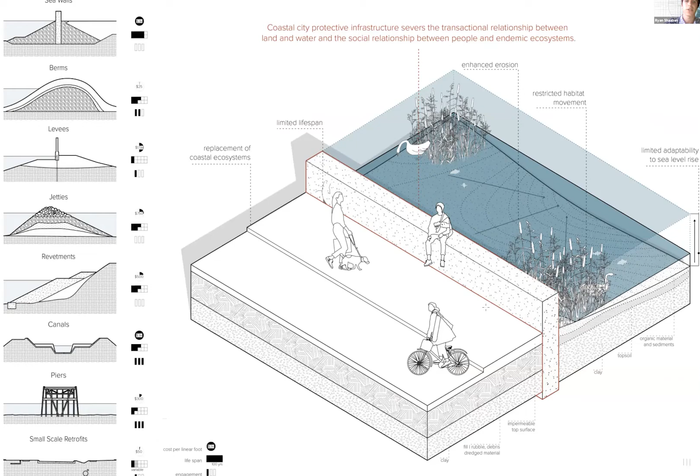So in order to address the issues of hard infrastructure and sea level rise, this thesis in a poetic sense strives to change the perception of how we as humans relate to nature by accommodating the dynamic qualities of water into the urban grid. San Francisco is a great location of study.

It's a peninsular condition in which the majority of predicted inundation occurs on the bay side. In this estuary, there were once over 500 acres of ecologically rich tidal marshlands, but they were filled in the late 1800s. To protect those lands, the Embarcadero seawall was built in 1916, and to this day is their only form of infrastructure and in need of repair.

It protects over $100 billion worth of assets, including vital transportation networks, such as the BART and Muni Rail. The city has set aside $5 billion to repair the system, but here as designers of the future, we must intervene and say, instead of pouring money into a broken system, we need to invest in adaptive strategies that renew the balance between urbanity and nature.

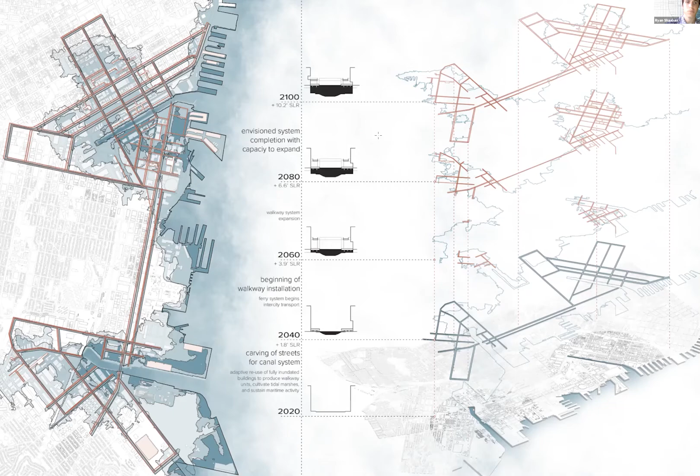On the lower level of this system, floating walkways take place of traditional sidewalk, where pedestrians board boats at the corners. In order to cross, pedestrians go along ramps that rise up to 25 feet to allow for ferries to pass below. The upper level is dedicated to alternative means of transportation.

Since we're in an innovative city, such as San Francisco, we can expect technologies such as compact electric cars or various personal transport vehicles to be commonplace.

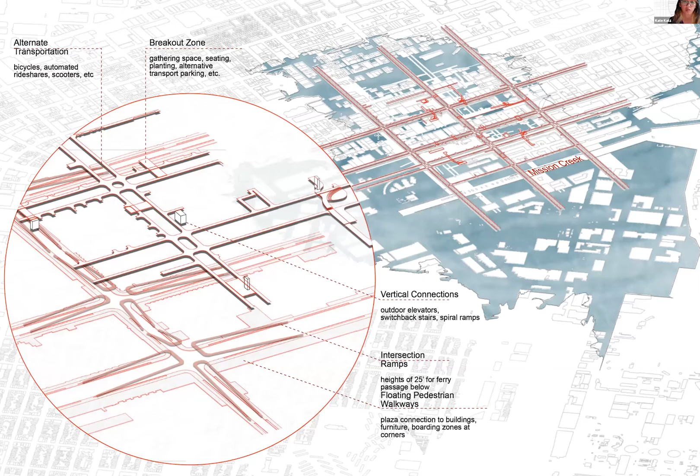Together, these elements create a circulation network, where instance moments, such as the way a path connects to a particular building, become moments of pause and relief to enjoy the new cityscape in the area.

On the lower level, the paths widen to become plazas, while on the upper level, they become breakout destinations, which can connect to certain occupiable rooftops that are given back to the public realm. Since San Francisco is culturally a walking city, this system emphasizes the pedestrian network.

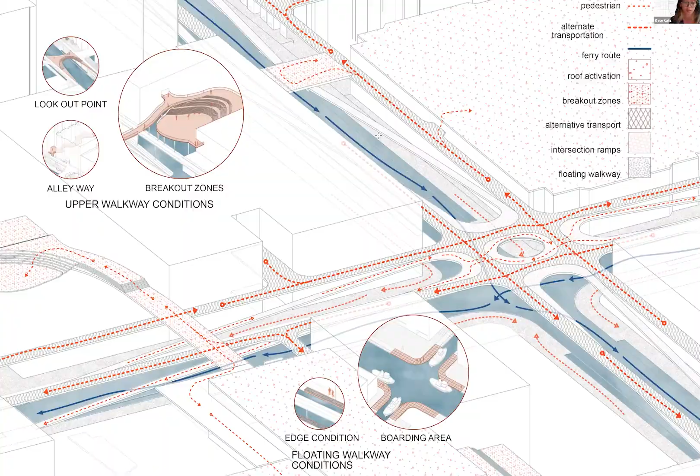All of these moments composed together create a distinct waterfront district that allows San Franciscans to engage with coastal ecosystems while building systemic support of maritime activity.

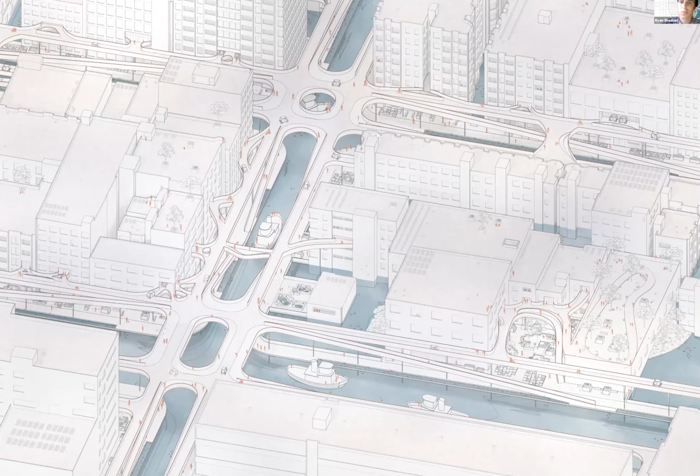This perspective shows the makeup of the floating walkways and how, in either addition or subtraction of the modular walkway surface, one can create street furniture elements or apertures to engage with the ecology below.

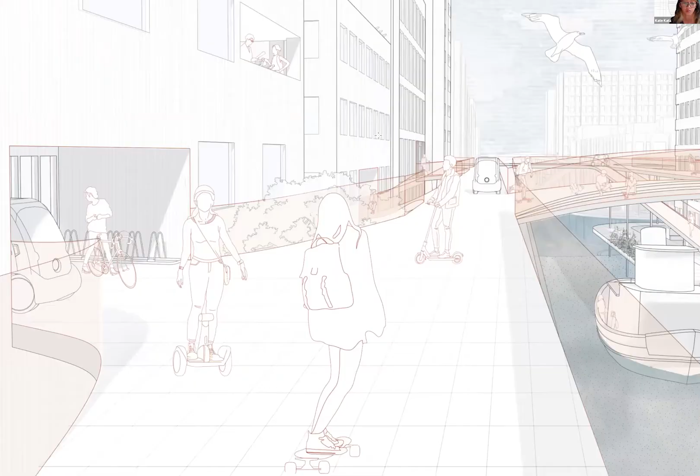This upper walkway perspective shows how the ramps slope to connect to the buildings, where there is a second raised lobby floor, and the building accepts the walkway in the language of a carve.

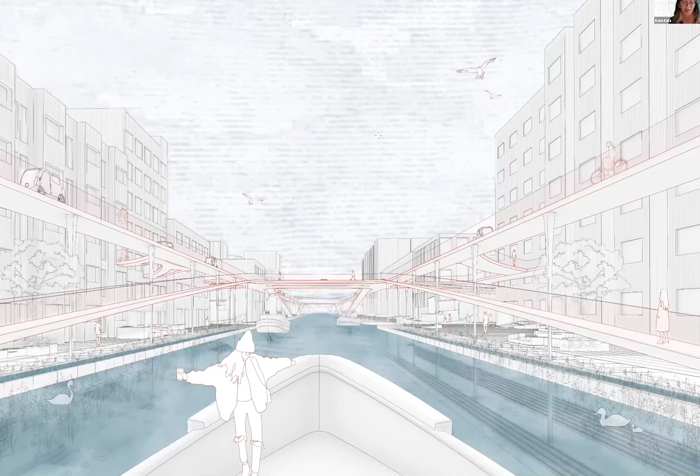Finally, a boat perspective. These boats become the main form of public transportation, taking place of city buses along major streets, while smaller personal boats can be used on secondary streets.

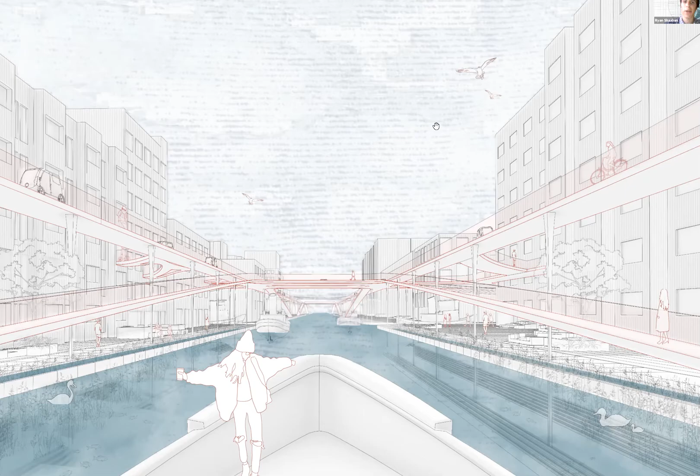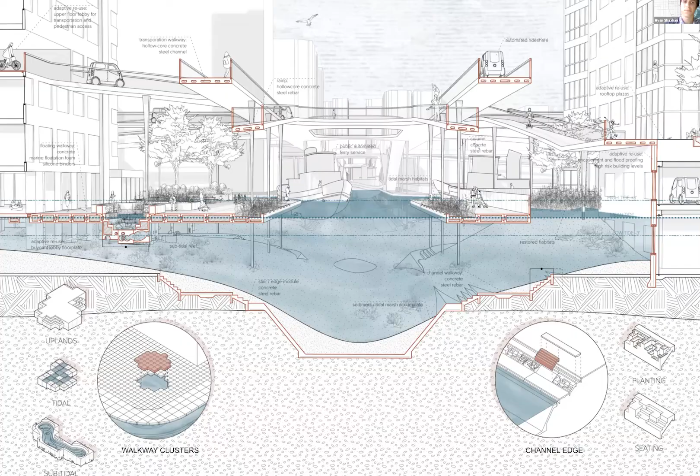The floating walkway is composed of modular units that are buoyant, allowing the pedestrian levels to adapt and fluctuate with diurnal tidal changes. This system enables a once restricted landscape of wetlands to take place within the city, connecting pedestrians to their environmental context. This new vision of the public realm in this waterfront district hopes to shine an optimistic light on how we can live with nature once again as we deal with the consequences of climate change.

Thank you. Thank you.

Shelters for women first appeared in the 1970s in rooms rented by volunteers or apartments rented by individuals. In the next decade, they were institutionalized and experienced professionalization. And even though the number of shelters has grown significantly, the majority still exist in housing infrastructures that have been slightly modified to accommodate a higher number of women and children.

Our thesis focuses on the typology of shelter for women and children survivors of domestic abuse, and we propose a new model of women's shelter that investigates the architecture of boundaries as a spatial organizer and regulator between public and private areas. Additionally, we're considering the stages of healing that women and children go through after escaping an abusive situation and their transition to community.

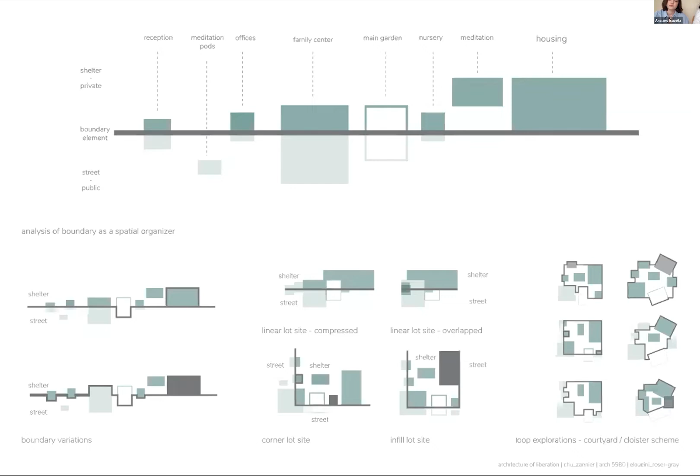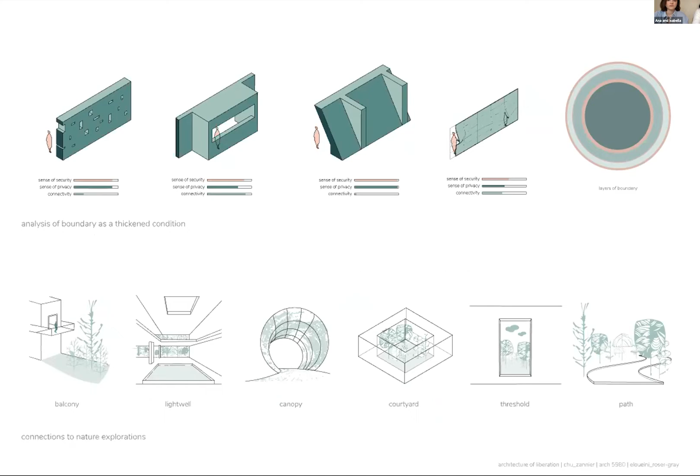The diagrams above are an analysis of the boundary as a thickened condition, based on three criteria: sense of security, sense of privacy, and connectivity. The diagrams below are depictions of spatial moments where there's a direct connection to nature with the built environment.

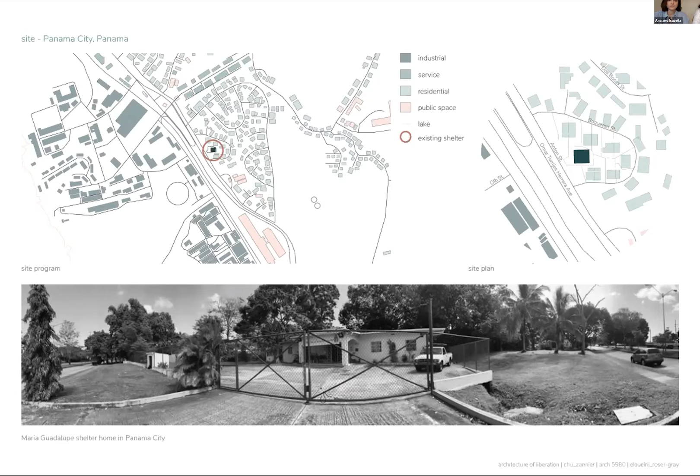Here you can see a comparison between the existing layout of the shelter and the proposal of our project. The difference between these two is that in our proposal, we are moving away from the idea of a single building and introducing a network of different buildings.

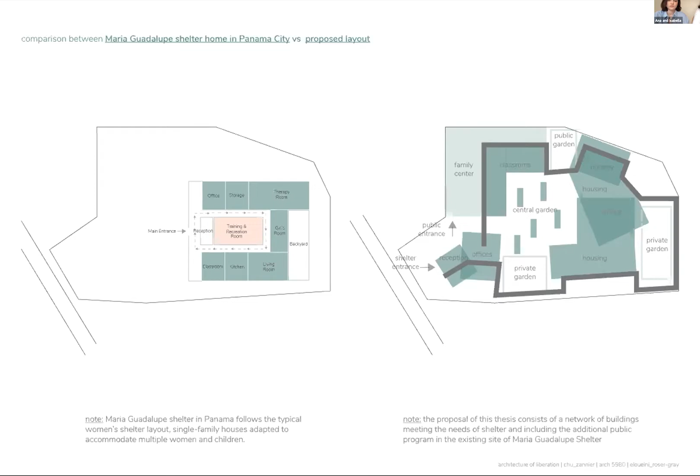Here is a bird's eye view of the entire project. As you can see, the project is divided into 3 main volumes, where number 1 is the family center, number 2 is the entrance to the shelter, and number 3 is the housing component of the shelter.

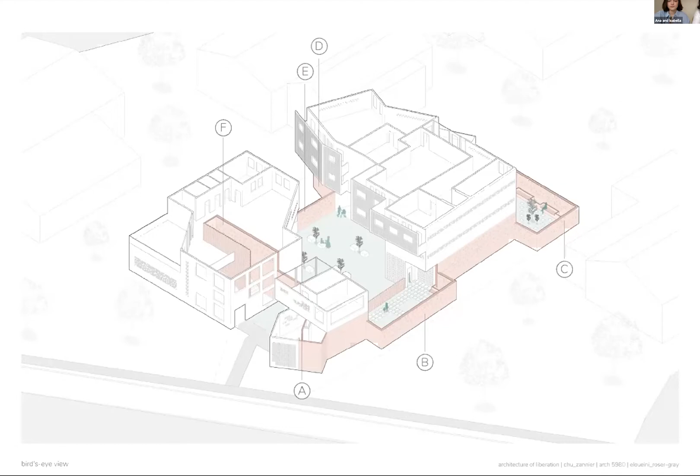Here you can also see, in the continuous element of the boundary, the specific locations where this boundary has variations. These are the 6 different boundary conditions that exist in the project. First, we have a threshold condition of the boundary.

Wall type B is the boundary opening up to create an extra layer of privacy, which would be semi-private. Wall type C is the boundary holding planters for gardening activity. Wall type D shows the boundary completely surrounding a volume to create an extremely private moment, which is the nursery in the shelter.

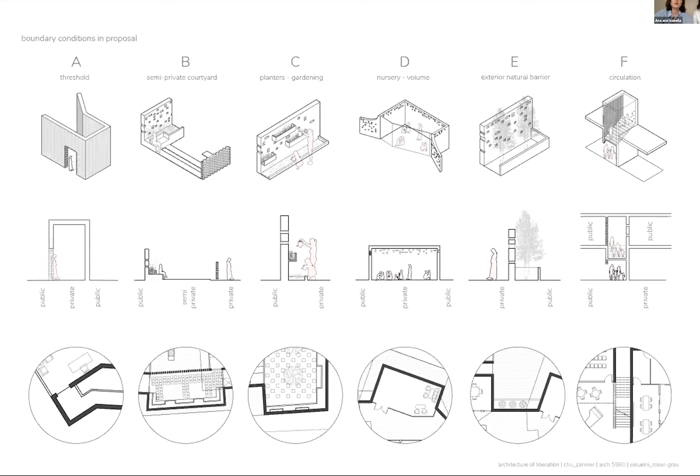Wall type E has the boundary accommodate an extra layer of privacy with vegetation. Wall type F is the boundary holding vertical circulation, or stairs.

On the ground floor, you can see this boundary element continues throughout the entire site. It starts with the threshold condition at the entrance of the shelter. Then this is the semi-private corridor that the boundary creates. In the family volume, it holds a service space and vertical circulation.

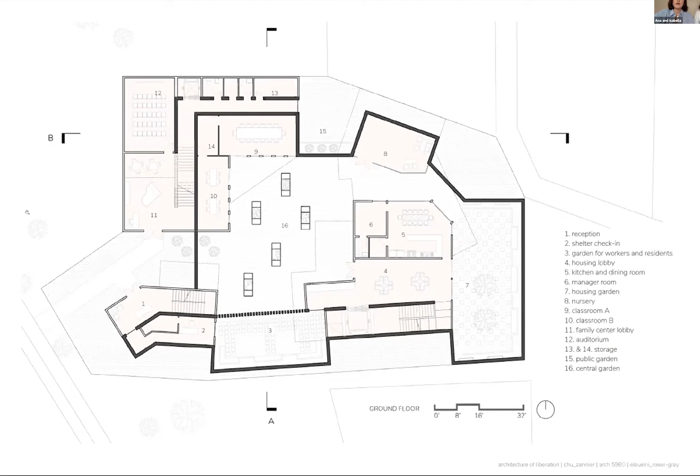And then in the family center, pierce through the volume to completely separate areas of that building to be completely private from the public space of the family center. And then on the upper levels is where the library of the family center takes place, offices for workers, and bedrooms for the women and children of the shelter.

In section A, we're cutting through the family center and we're showing the boundary as a hallway and divider, then the main central open space of the project, and then the semi-private corridor, which is also wall type B. And in the middle ground, you can see the facade of the housing component.

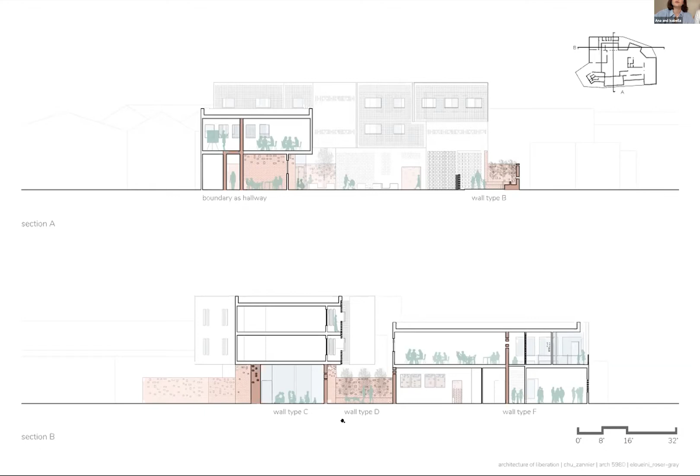And then below, section B, we are cutting through the nursery space, surrounded on both sides by the boundary, and with the bedrooms above that are hovering over the boundary. And then we're cutting through the family center as well, showing the boundary as vertical circulation. In the middle ground, you can see wall type E, which is the boundary, and the vegetation layer.

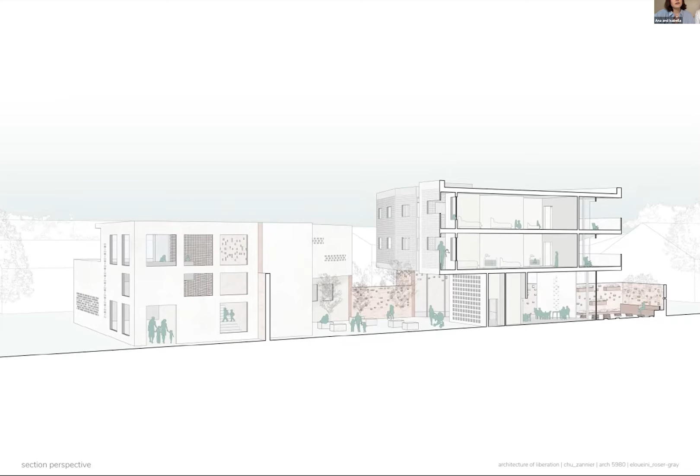And then in this section perspective, we're cutting through the private garden in the back of the housing component of the shelter, the common space on the ground floor of the housing, and shared balconies at the back, and then in the front of the building, a double facade system that allows for more private set of balconies.

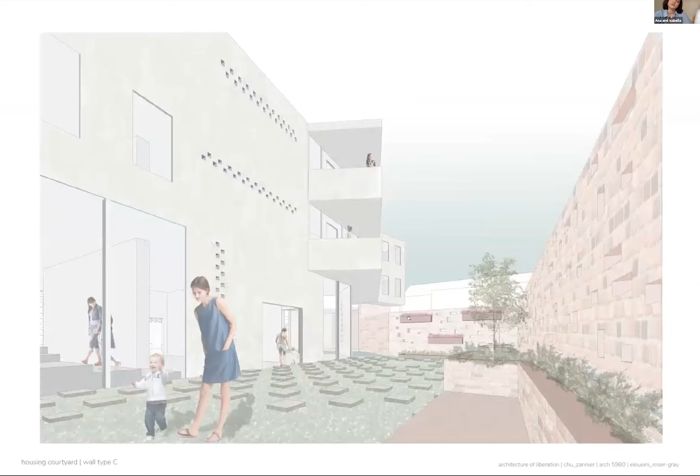Then in this vignette, you can see how the boundary creates this semi-private corridor leading towards the entrance of the shelter. And then here, you can see the private courtyard in the back part of the housing component. And then here, you can see how the boundary creates that space of the nursery and the relationship this nursery has with the central garden of the project.

And here, you can see how this boundary goes inside the building and inside the family center and creates the main stair of the building.

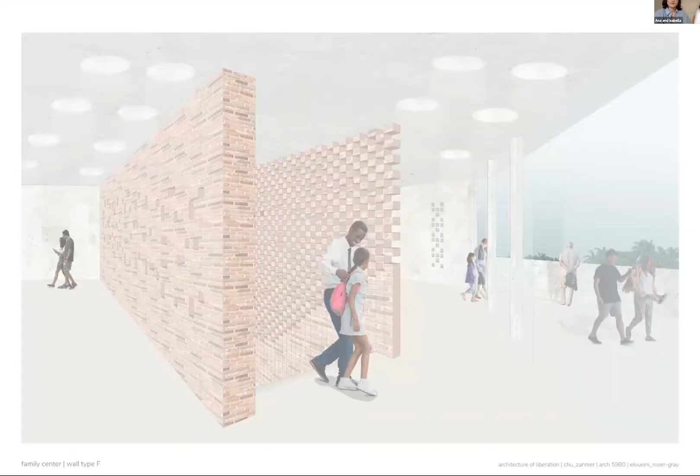Yara, are you ready? Okay, thank you everyone for joining us today.

The title of my thesis project is Involuntary Utopia: Excavating Peace in Subterranean Jerusalem. In the Israeli-Palestinian conflict, the act of architecture is an act of violence, and it's an act of occupation, and it's the architecture of frontiers.

I posit that in the near future, urbicide, which is defined as violence against the city, and spatiocide, rather than genocide, which is the targeting of land, as defined by architects Eyal Weizman and Sari Hanafi, will destroy the urban fabric of Jerusalem.

The following proposal is a speculative exploration, proposing the subterranean realm as the new frontier, where the act of architecture will unite these parties rather than divide them.

Already, the underground is becoming the site of many activities, such as the smuggling of goods and people across borders, and warfare and espionage. Tunnels appear at the seam of the highest conflict zones, such as Gaza and the Golan Heights.

In Jerusalem, underground spaces have a different connotation. These are sites of preserved history and narrative making. As the city above falls victim to this urbicide and spatiocide, and her people become accustomed to life underground, they are driven below the city's surface.

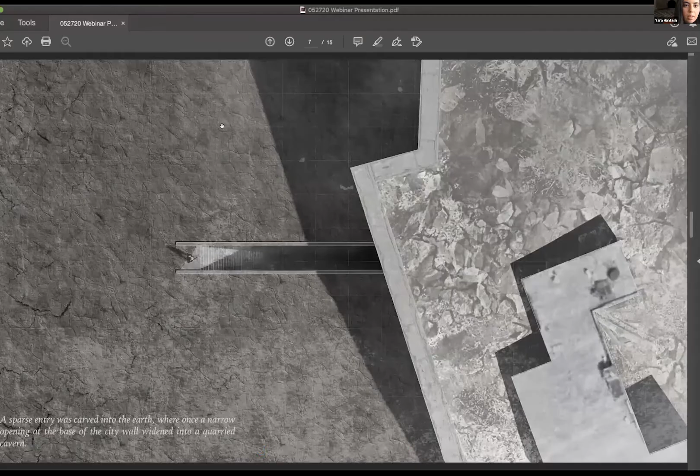Yara, your screen is not moving, so you want to make sure. Sorry for interrupting. Oh no, sorry that it's not working. All right, so can you take a few slides back and start again? Yeah, here? Okay. It wasn't moving from the first slide, so you might want to go back a couple. Okay, so is it moving now?

Okay, and so here could you also make it full screen, please? Yeah, it shows full screen on my computer. Okay, now? Okay. It's still not full screen, but I think it's okay.

Still not moving, Yara. Still not moving?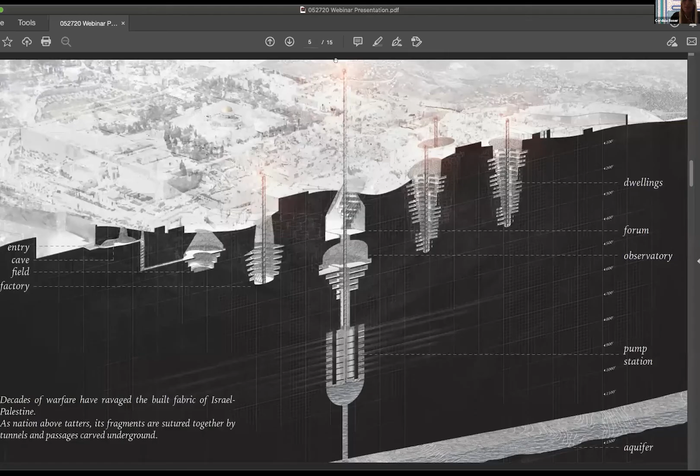You might have to. I guess this is the only way I can do it. Okay, where it's moving. Okay. That works. Yeah, sorry about that.

And so the descent begins to the north, where carved into the city wall, the mouth of the cave allows in the exiles. It has been quarried over centuries to build the city above, and the cave is now a haven for the exiled Jerusalemites.

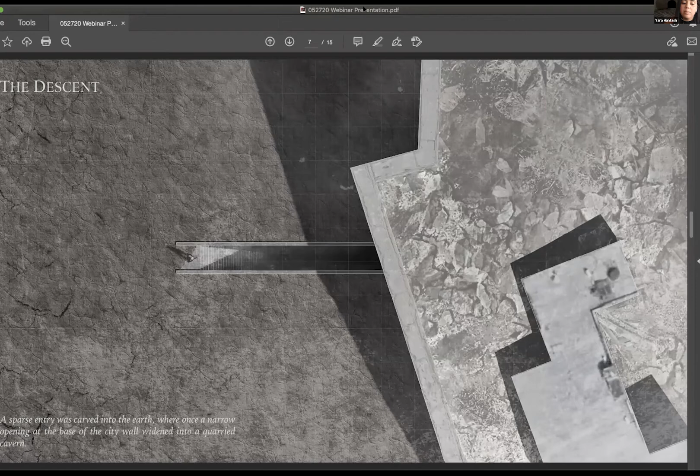A channel is dug into the earth, widening the entry for the influx of exiles fleeing the wreckage they have wrought above. The cave is where they gather, the banished masses divided along common lines.

As resources dwindle and survival becomes elusive rather than certain, it becomes clear that the old divisions of above do not apply below. The former urbanites remember the fellahin who harvested olives and herded sheep, and the kibbutzniks who yielded masses of crops exported across the globe.

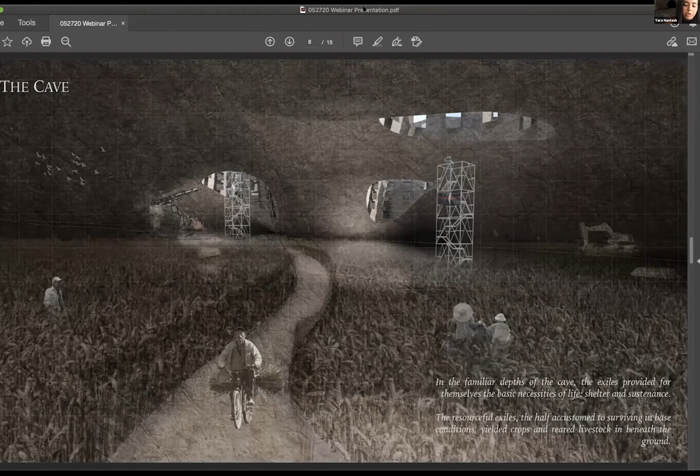Together they make the cave a fertile land from which they subsist. Mu'allimin Bina, traditional master builders, and Adrichalim, trained architects, carve holes in the ceiling of the cave, flooding their fields with light. As the needs of the exiles expanded, the builders continued to quarry the cave, making more room for cultivation and using the stone to build other spaces.

From the cave emerged the field, a monument to resilience. Palestinian sumud, or steadfastness, and pastoral memory are essential to the sustenance of the field. Here, livestock are kept and tended, and the animals are ready to descend into the market for slaughter.

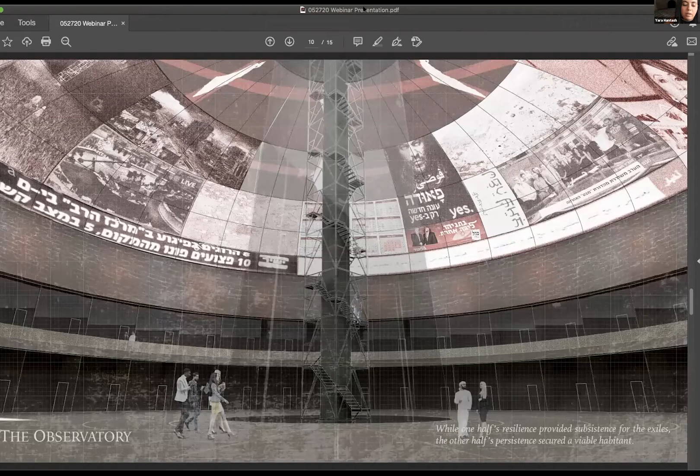Where the historic quarters that divided the city above met, a tower soars high into the sky, a beacon for those miles away of the tenacious life flourishing beneath the bones of Old Jerusalem.

On the observation deck, the tower is monitored and controlled in the observatory. Where the field is a testament to resilience, the observatory is a monument to persistence. Here, decades of Israeli advancements in technology provide the settlement with energy and water.

The operations of the settlement are monitored, a new calendar is devised, and the abandoned city above is remembered by the observatory. Above the observatory sits the forum.

Open to the world above, the exiles gather beneath the meager sunlight to exchange goods and ideas, to escape the toil of the cave and the depths of the observatory, and to seek the wisdom of the elders.

Old myths and new emerge to create a shared memory of a destroyed past and an uncertain future. Children play together in the streets, and as the children grow, a new language grows with them, a hybrid of Arabic and Hebrew that learns common roots and forgets the divisive words from above.

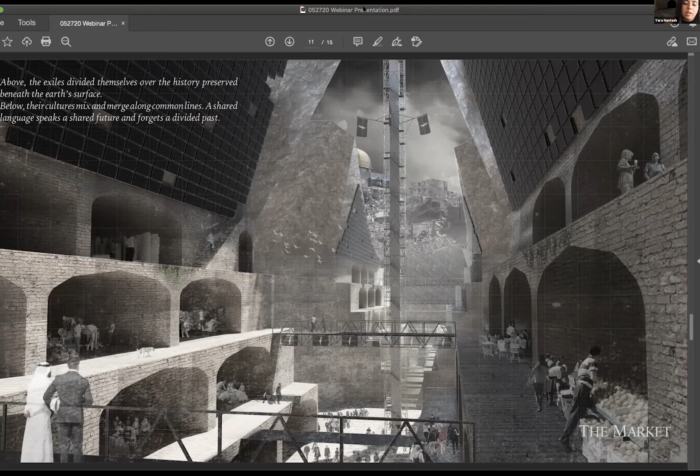On the tower, banners are hung depicting symbols of the new world that the exiles have excavated. South of the market, deep wells are cut into the earth, and radiating from them are the dwellings.

As their excavation was slow, the exiles did not have the opportunity to segregate themselves as they had above. The private spaces of the dwellings face the interior of the wells, and in turn, the private acts of daily life are revealed to each other. Shared intimacies not possible above show the exiles how much they've shared for generations, yet never dared to acknowledge.

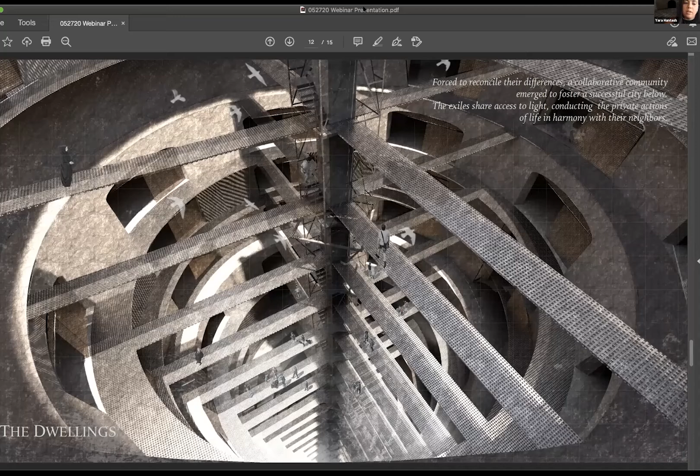As the exiles grow in unity and their excavated futures become more certain, they find the desire to perform their new culture. West of the forum, deep beneath the surface, the theater is excavated. Grand, it can host all of the exiles.

They dance the debke and the hora together at the same time. They sing of hewn stone and dark fields. They recite lines about abandoned cities and divine light.

Deep underground, after years of occupying the new frontier, they no longer need light from above and illuminate the theater by their own means. Here, shared culture of the involuntary utopia manifests.

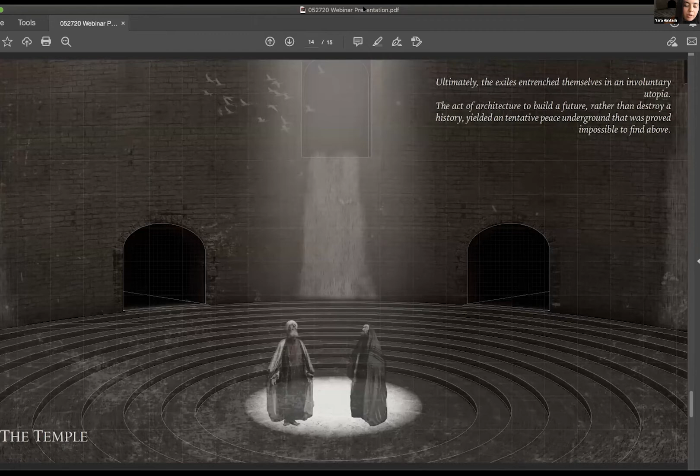Beneath the foundation stone, a sacred piece of earth housed by numerous temples and shrines for millennia, a deep but narrow well is dug. A single shaft of sunlight beams into the space once a day at noon. The temple is a shrine to light, the exile's most coveted remnant from above.

As years pass, the exile's skin turns gray, their vision dims, and the rituals of above are forgotten. Light becomes sacred. It is the exile's link to divinity, and in this sacred space, true unity is found.

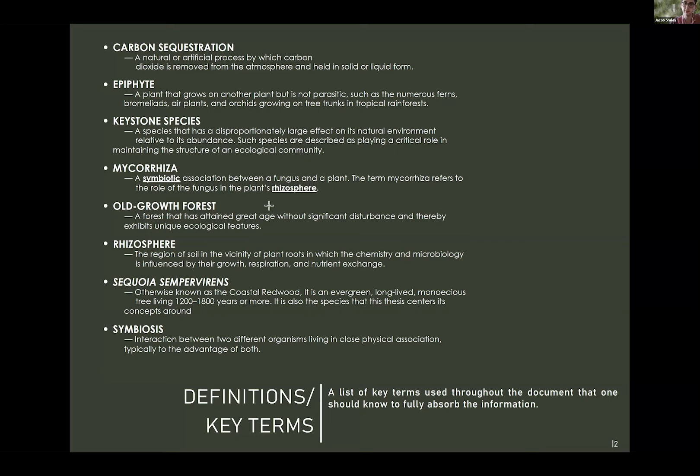Of the 2 million acres of old-growth redwood forest present in Northern California in 1840, only 100,000 remain today, just 5% of the original total. Rapid and extensive deforestation and expansion of agriculture and real estate in the area is largely what is attributed to this. While what old-growth forest remains is mostly protected under state and federal legislature, nothing is being done to safeguard this ecosystem from the threats of climate change.

Hotter and drier summers threaten the hydrological balance of an ecosystem where up to 60% of the water comes from fog rolling off the Pacific, a phenomenon threatened by rising temperatures.

I'd like to begin by providing a biological profile of the coastal redwood. It is the tallest tree on Earth, reaching heights of over 350 feet and 35 feet in diameter. Their natural habitat consists of a 400-mile stretch of land that hugs the Pacific coastline, extending from Big Sur in the south, all the way up to the extreme southwestern border of Oregon in the north.

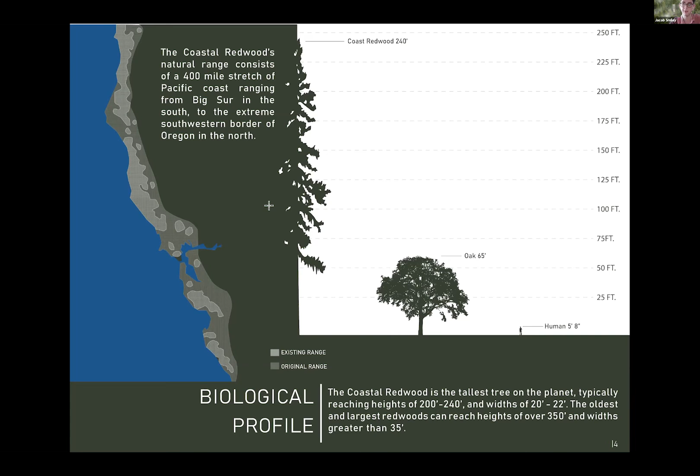Another important characteristic is the redwood's longevity, with the oldest redwoods reaching over 2,000 years of age. This longevity is a crucial aspect in relation to the forest's efficiency at carbon sequestration.

While there is a significant amount of biomass in tropical forests, the rate of decay is also very high, which brings these numbers down. Redwood forests, on the other hand, with the enormous size of the trees and the natural stasis of the ecosystem, are significantly better suited for carbon sequestration.

Second growth forests, those logged in the last 200 years or so, house nearly twice the carbon sequestered by a tropical forest. Old growth forests, however, sequester more than 10 times that of a tropical rainforest. This is important to consider as we live in an increasingly emissive society.

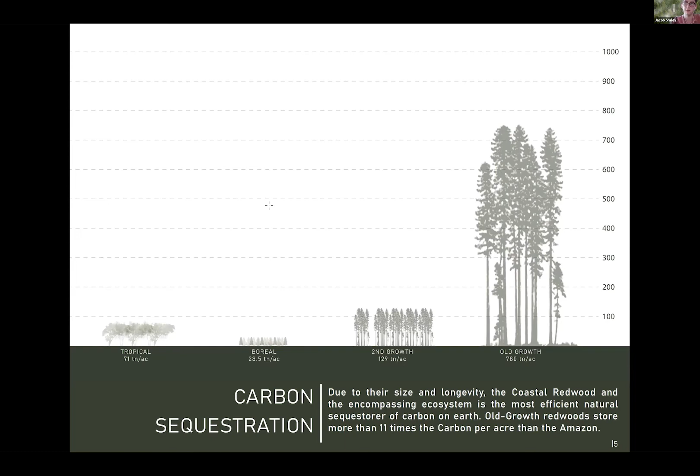In addition to its importance for carbon sequestration, the redwood tree is a keystone species within its own ecosystem, with hundreds of other flora and fauna dependent on its presence for survival. Many of these species are endangered and only found within the redwood forest.

Numerous birds nest within the canopy. The 2 I've chosen to focus on are the marbled murrelet and the northern spotted owl, both of which are endangered and both of which are only found within the redwood forest.

The dense upper canopy of the redwood traps a lot of fallen plant debris within it, causing it to decompose into soil within the branches, supported by the branches. This canopy soil has been known to house spruce and fir trees over 100 feet in the air, essentially creating a floating microbiome within the forest.

The importance of the redwood to this unique ecosystem cannot be understated, and it demonstrates yet another reason why its conservation is so important. So while the case for conservation is clear, the implementation of these strategies is not.

Legislative protection of the forest is great, but for meaningful conservation efforts to take place, one must look to physically address climate change, which, taken in its totality, is well beyond the scope of an architectural thesis. Therefore, this thesis proposes the implementation of architectural interventions within the ecosystem of the redwood rainforest that actively address the effects of climate change at the scale of the biome to restore, strengthen, and conserve the redwood rainforest.

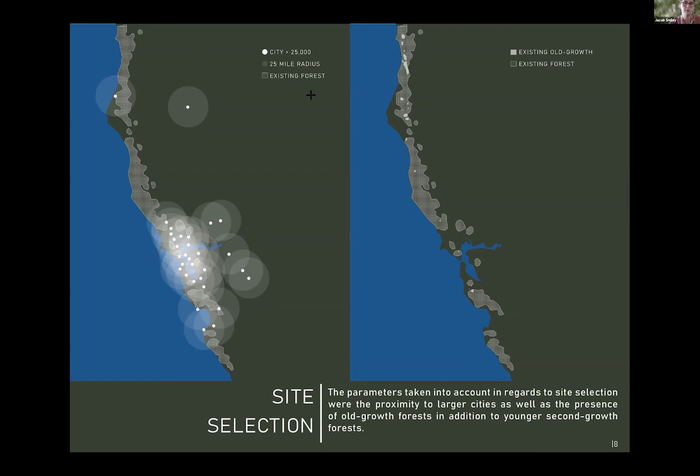When selecting a site to use as a case study for this, I considered the presence of old growth forests as well as proximity to urbanized contexts. In addition to the ecological roles of this thesis, creating better opportunities for people to interface with the environment was very important to me. This led to the selection of the Muir Woods National Monument as the ideal site to implement the strategies found in this thesis.

Located 10 miles north of the Golden Gate Bridge, the monument is the most frequently visited redwood reserve in the world, with over 1 million annual visitors. In addition to its popularity, the steep canyon proved very difficult to log in the early 20th century, leaving over 40 acres of undisturbed old growth forest within the monument.

Moving on to the architecture itself, the project consists of 3 different components: a series of fog towers distributed along the western ridge of the canyon, bio towers scattered throughout the canyon floor, and a redesigned visitor center meant to amplify the visitor's experience. The fog tower is skinned with a fog harp, which wicks moisture out of the air, much like the leaves of a redwood tree.

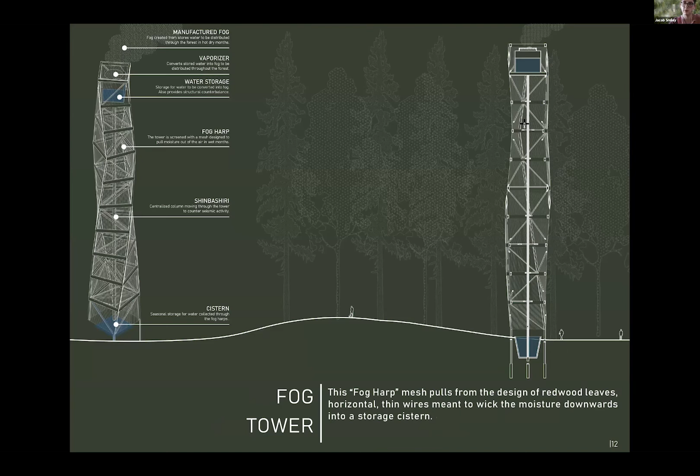The siting of a series of these towers along the western ridge of the canyon allowed them to be hit by a lot of the wet coastal air. This water would be stored in cisterns located at the foot of the tower and redistributed throughout the forest via water vaporizers found on top, where the prevailing winds coming off the Pacific would push the manufactured fog into the canyon.

The biotower has been designed to mimic and supplement the ecological niche of the redwood, as well as allowing visitors to interact with the tower, moving vertically from the forest floor all the way up through the canopy.

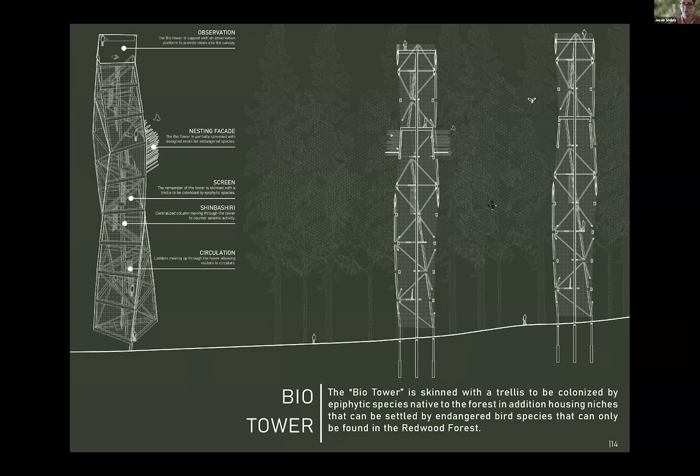The biotower is skinned with a trellis to be colonized by epiphytic species native to the redwood forest, in addition to housing niches that can be settled by endangered bird species found only within the monument. Those are listed here. For instance, the marbled murrelet, a semi-colonial bird that inhabits branches - the facade would have branches sticking out. The northern spotted owl, which inhabits primarily notches within the trees, would have a notched facade through which the species could inhabit.

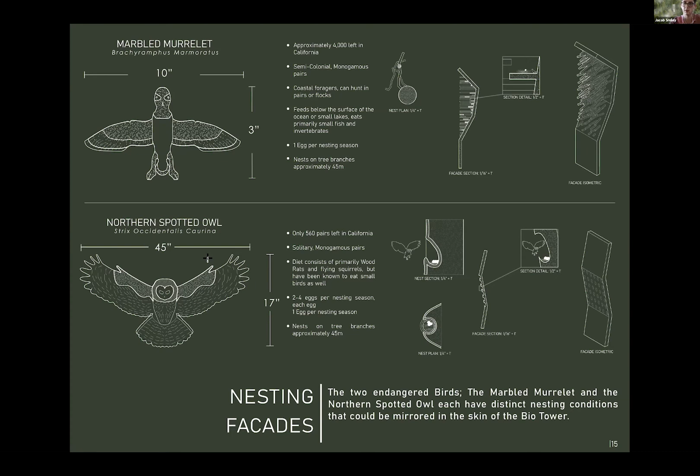Both formally and structurally, the biotowers and fog towers are identical. The form is derived from stacking 20-foot redwood structural modules that taper slightly to increase structural stability. These are then twisted to minimize wind loads and optimize surface area in differentiating views. 70% of the way up the tower, it begins to twist back the other way to partially shade areas used as shelter for endangered species.

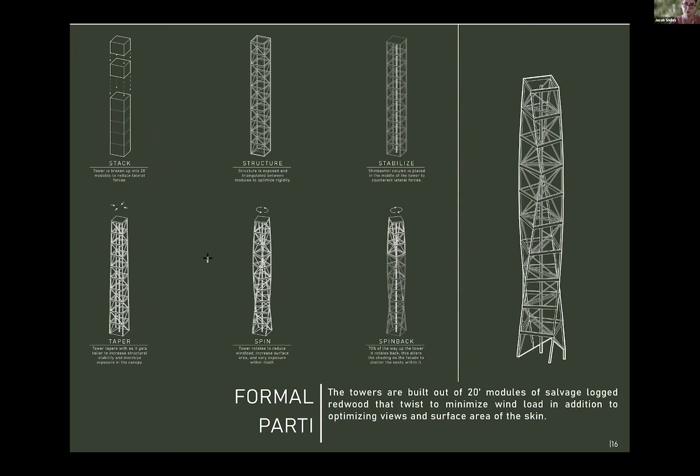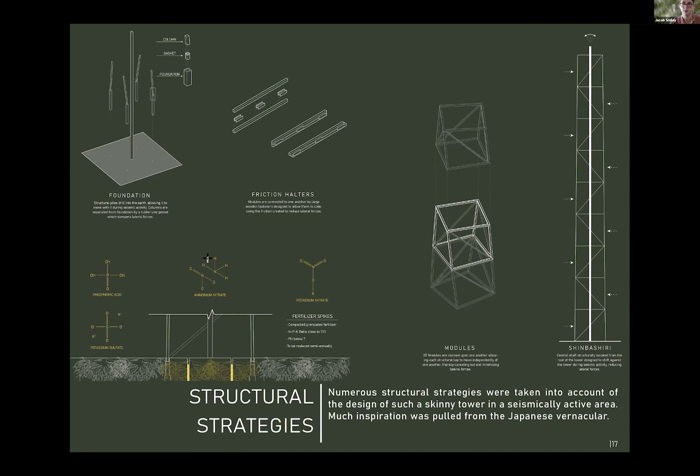Structurally, designing a 200-foot tower made out of wood in the middle of Northern California, which is incredibly seismically active, poses a lot of challenges. I did a lot of research into the Japanese vernacular, particularly the architecture of the pagoda, to deal with seismic intensity. By utilizing these numerous strategies to counteract seismic forces, the project uses its material as something to be proud of, rather than something you must hide because of a weakness that hinders it.

Relative to one another, the fog towers occupy the western ridge located on the left of the site section, while the biotowers are spaced throughout the denser forest floor, both of which supplement and strengthen the ecosystem of the redwood forest.

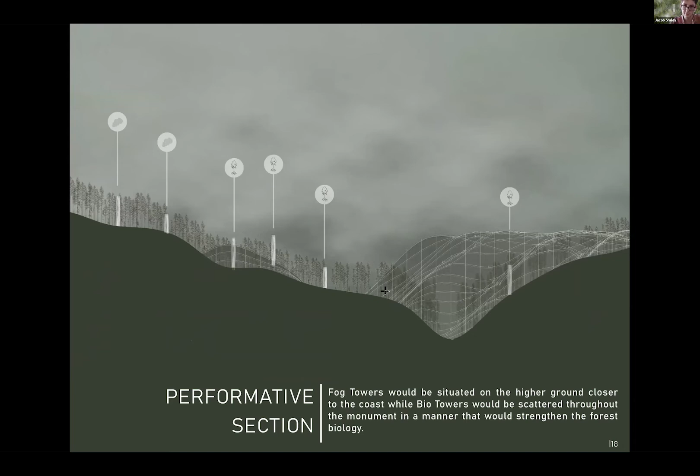The third component of this thesis consists of a redesigned visitor center. The existing conditions not only struggle to handle the large influx of visitors, but fail to optimize educational aspects of the forest as well. In addition to an educational area, the building will house the typical park facilities, restrooms, and gift shop, in addition to space dedicated to forestry research, to be loaned out to universities focused on the redwood ecosystem, as well as a series of creative lodges to be leased to artists and writers wishing to work in and capture the natural beauty of the forest.

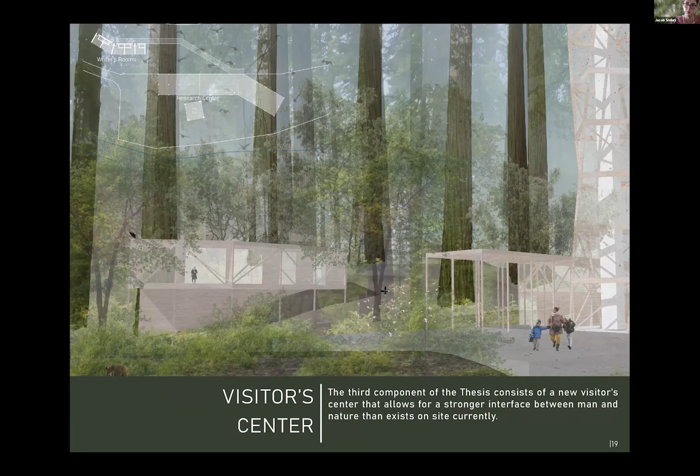The visitor center will also house one of the towers found scattered throughout the forest. What differentiates this one from the others is that its central shaft is replaced with an elevator core, making the upper canopy of the redwoods accessible to all.

That's pretty much it. I like to end with this quote by conservationist Laura Lyon White, who facilitated the exchange of the land that ultimately became the Muir Woods National Monument: 'Idiots, criminals, and the insane come and go regularly every few years, but the big trees, if they go, may never be reproduced on Earth.' That's it. Thank you.